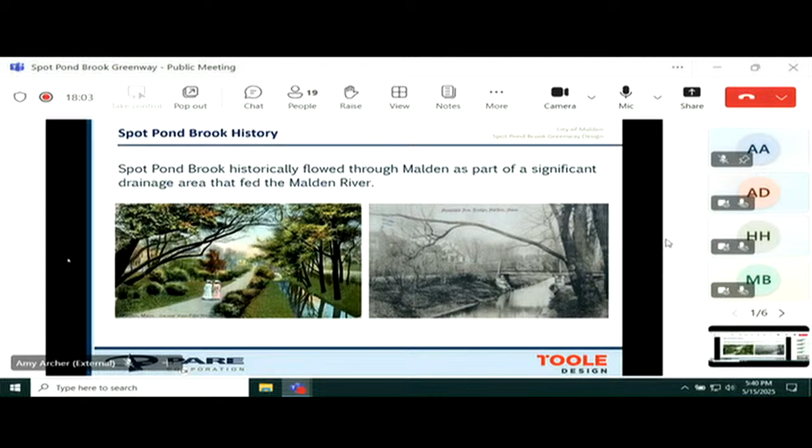Because of flooding, though, and an expanding city, it was culverted to prevent flooding and to allow more development in our community. So one of the benefits is you don't have as much flooding. One of the negative sides of that is you don't have as much of the open space or the nice walking trails that you might have had that naturally would have occurred along a brook.

So here you see in 1897 some rather large drainage pipes being installed. In the distance you can see, I think, the Center Methodist Church, where we would be approximately in the location of this building here.

On the right, you can see the culvert, I believe at Clinton Street in the lower right, and then in the middle, that is actually Oak Grove train station. And you can see really in the distance a smokestack. That is the second Converse factory, which is still on Washington Street in Melrose. I think it might actually have a different name in Melrose, but it's pretty much Washington Street.

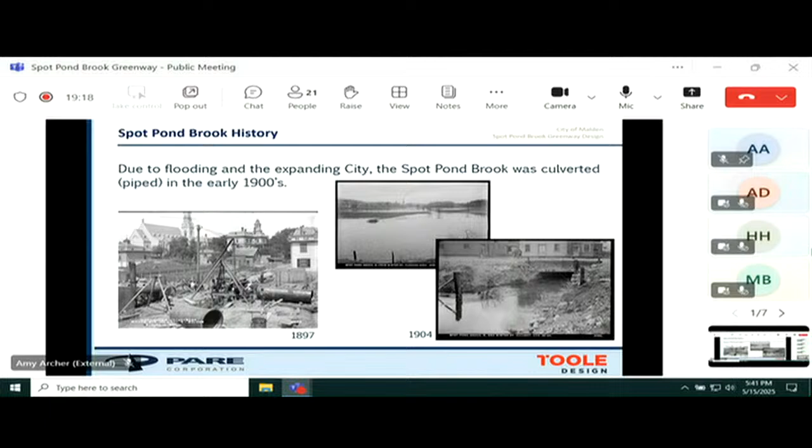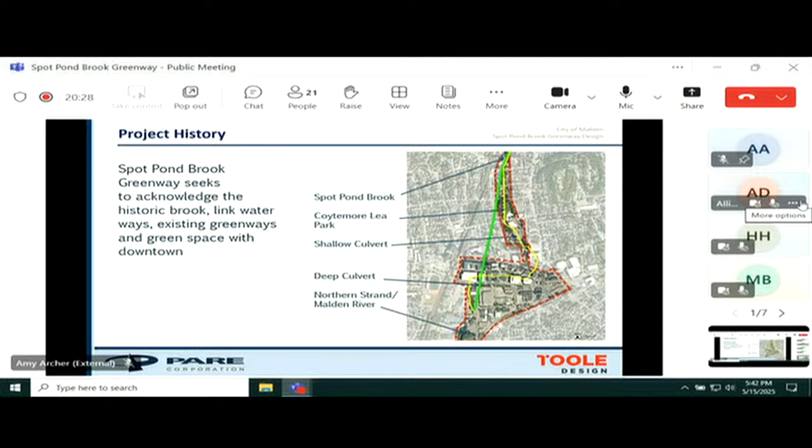So we started this project way back in 2020 with a feasibility study. That feasibility study was funded through local grants through our CPC, and it was co-sponsored with Bike to the Sea and this DCR grant and myself. The thing we were primarily looking at, from 2020 to 2021, was: is it even possible to do this? Is there a way to build this? We were primarily looking at what alignments would be used.

Some of the alignments that we looked at with the help of Pare and some other consultants were Main Street, Washington Street, and then looking at the historic drainage easement along the culvert.

Based on the feedback that we received, I think we had maybe 3 public meetings at that point, and they were very well attended. It was primarily online because it was during COVID. The priority and the public really wanted it to be along the historic route, which is what was selected. One reason being is we didn't want to impact parking and traffic along Main Street and Washington Street. Main Street is a heavy business district. Washington Street can be really narrow in some locations and could eliminate parking. So we chose to go the path of least amount of conflict with those uses.

In 2022, we started doing more conceptual designs with a second Mass Trails grant, and we had more public engagement meetings in the fall of 2022. And then that has kind of brought us to where we are now.

In 2022, we got to 25% design. Just so people understand very briefly, in order to build something like this, when it has to do with engineering, you do a 25% conceptual design that basically is just saying: where is this going to go? What might it roughly look like? What side of the road is it going to be on? Is it going to use existing crosswalks? Are you going to need to add new crosswalks?

Things like that. We got to 25% design in 2022, and that year the City of Malden took that design and were able to get us onto the state's Transportation Improvement Plan. It's called the TIP. The TIP is how you build big infrastructure projects. Probably the most famous example you'll know of now is the Green Line extension into Medford.

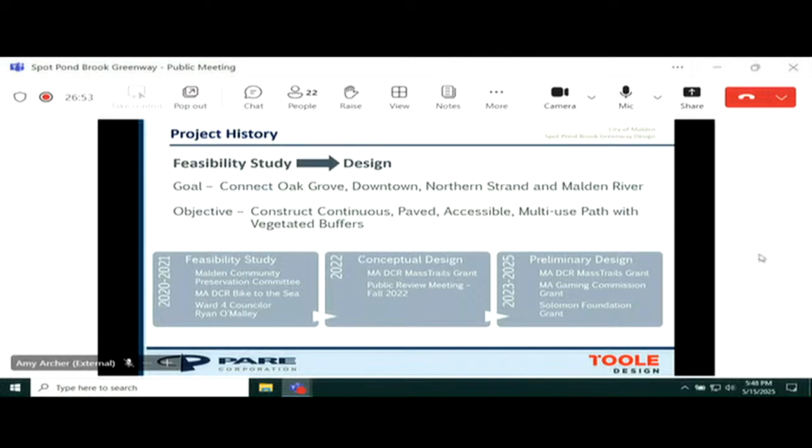It's going to then go west on Charles Street, and then it will take a left going south on Canal and connect through to the path at the approximate location of the bike kitchen. And that's where we'll connect with the Northern Strand Trail.

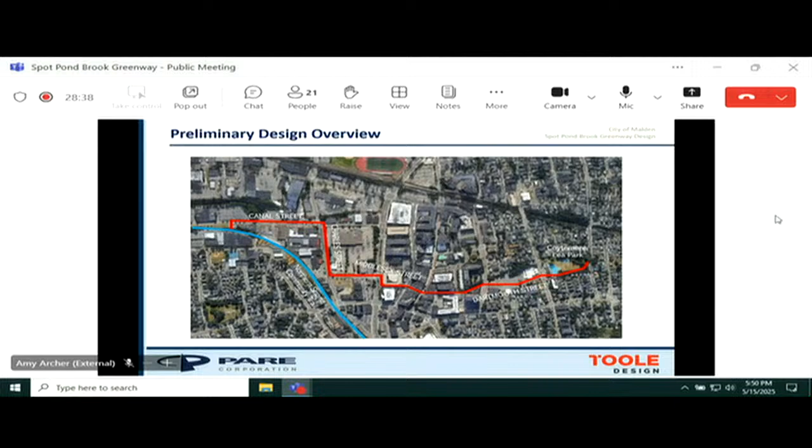As Ryan mentioned, on this screen north is to the right. That will be true for all subsequent plans you see, just to keep everyone oriented so you know what direction you're looking at.

To go over briefly the main objectives as we switched from feasibility to design, one element was to try to keep some of the existing infrastructure. The feasibility study took a look at the width of the right-of-way on each street and considered what may be constructed if we touched both sides of every roadway the path was intended to go down. There is a huge cost differential to that.

Every time we move a curb line, there are a lot of utility impacts between poles, underground elements like sewer and stormwater. So to make sure the project didn't swell to an even larger number than what Ryan had quoted, we worked through with city engineering that it made sense to hold one side of the road, to put the path on one side, work within the existing sidewalk and roadway space, and not touch the other curb line.

So what that typically gave us on most right-of-ways, or what we were attempting to accomplish, was the construction of an 11-foot shared use path that would replace one sidewalk. So the sidewalks today have a sidewalk on both sides. Sidewalk would remain on one side of the road, and the opposite sidewalk would be replaced with the shared use path, widened to 11 feet.

Where additional width was available, we're also putting a landscape buffer between that path and the roadway. We want to make sure that the path users, whether they're pedestrians, cyclists, or both, have some buffer wherever we can fit that in.

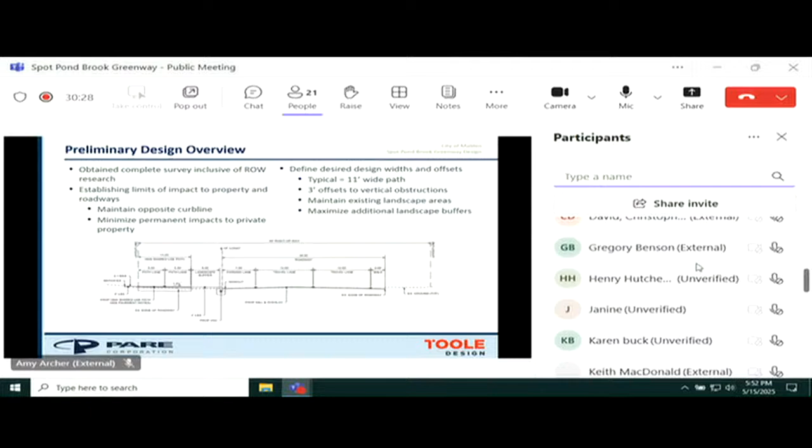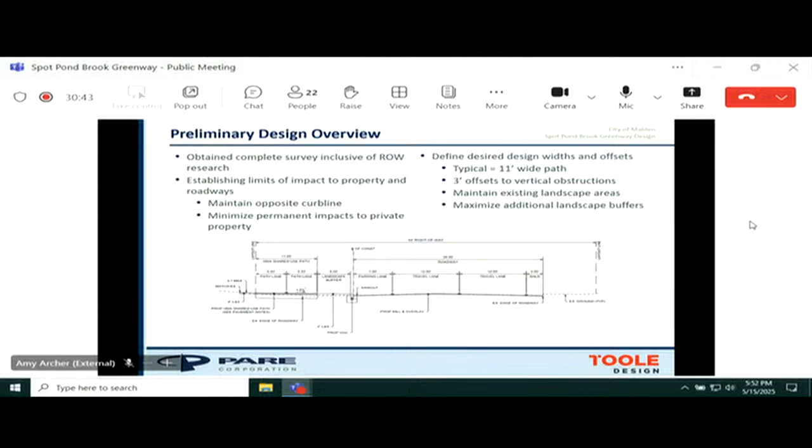Parking lanes typically are going to be shown at 7 feet. You'll see that throughout the plan as I advance along the different roadways. Travel lanes vary — we kept to what most of the roads are today, or coordinated with the city and the DOT based on the type of road, whether it's a collector or an arterial. Different widths are recommended for the lanes based on the type and general volume of vehicle traffic they carry. So that's kind of an overview of what we were looking to implement.

We then took a separate look at each intersection. Tonight's presentation doesn't go into too much detail about individual intersections, but we are working with the city to make sure crossings are safe, whether at a mid-block or at an intersection. We're trying to limit the number of legs of vehicular traffic that pedestrians and cyclists need to cross, and we're putting in additional features if they make sense. So we did consider raised crosswalks, raised intersections, to the extent that they are warranted.

What's on the screen now is an FHWA, Federal Highway Administration, assessment that evaluates the volume on each road, the speed of vehicles on each road, and the lane configuration to determine the best crossing treatment. As we continue the design and advance our coordination and review with the DOT, these elements will get incorporated at those crossings to make sure each one has the safest movement and the least conflict.

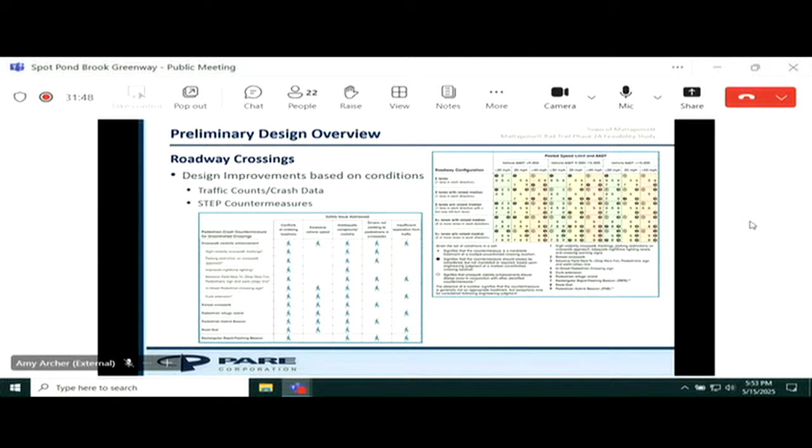All right, so to walk through this now piece by piece, we're going to start on Canal Street. I think Ryan described this in the opposite order, but I tend to start at the south and head north. So we're going to start on Canal, and work our way up from the northern Strand.

At prior meetings, if anyone was able to come out and join us last summer, we had a few different meetings and a lot of feedback. The path was originally shown on the west side. There was a lot of opposition to that, and a desire to have it on the east side.

There was also a necessity to make sure that the properties along that east side have proper vehicle access. So we did turning movements to make sure that different size vehicles, and we reached out to some of those commercial properties to determine the size of the vehicles that need access in and out, including the alley that goes behind and over to New England Coffee.

They have some of the largest vehicles coming down this road. Just to clarify, the two images on the left are showing the view looking north. Anthony's is on the left, the west side, and New England Coffee and the other adjacent businesses are on the right, the east side.

So once we assessed the need, there was also a desire to keep parking on both sides of this road. We had done some parking review and didn't see heavy use, but we were informed that there are uses during different times of the year where there can be parking on both sides of the road, and there was an intent that the city may want to keep that.

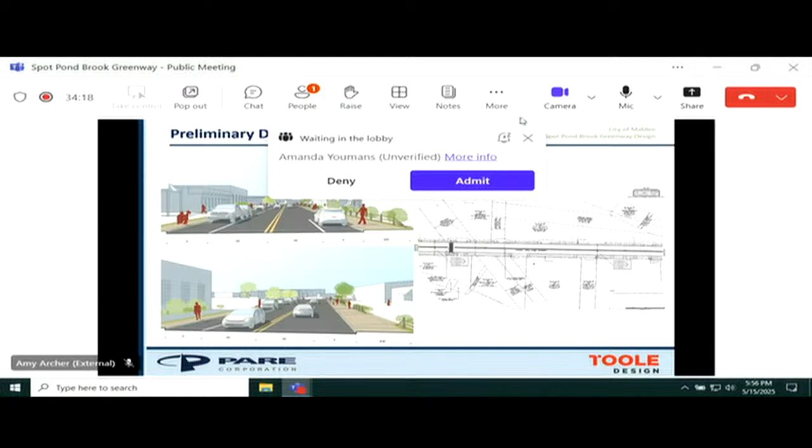That left an 8-foot path, which is a little narrower than what we're striving for the project as a whole, but it's a vast improvement over what's there. The existing sidewalk in many areas is only 4 to 4.5 feet, and there are utility poles and light poles within that hinder the ability, particularly for handicapped people, to get around those obstacles. This was a compromise of the space allocated within this roadway to fit the path.

8-foot minimum is commonly acceptable to DOT in areas where we have constraints. Ideally, they would like at least 10 to even 11 foot as the standard, but we'll justify the constraints that we have here with the different movements and vehicle uses.

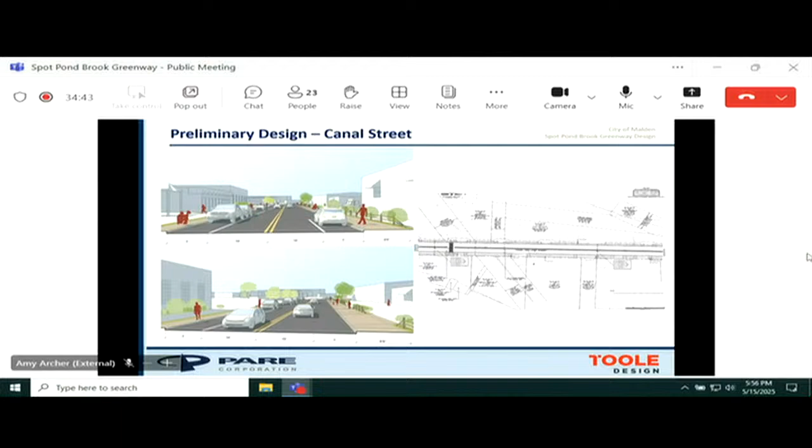With this being on the east side of Canal, we only have to make one crossing at the intersection to get over to Charles Street. So we would just cross within the existing crosswalk at the intersection of Canal and Charles within a protected cycle movement. So, advancing along Charles Street.

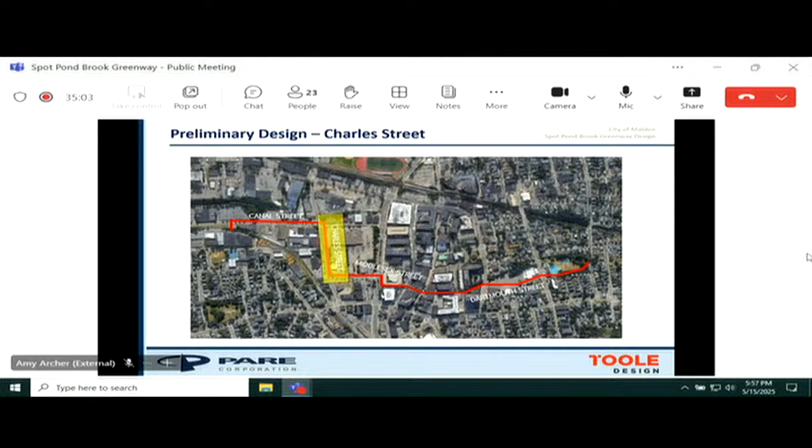For anyone that was at the prior meetings, nothing has changed on Charles Street. This is still what we had presented. As the figure in the upper right calls out, the top image is looking west. The Stop and Shop is on your right, New England Coffee would be to your left, so the left is the south side of the road. This is an area where there was enough room that we are able to put in the ideal recommended path.

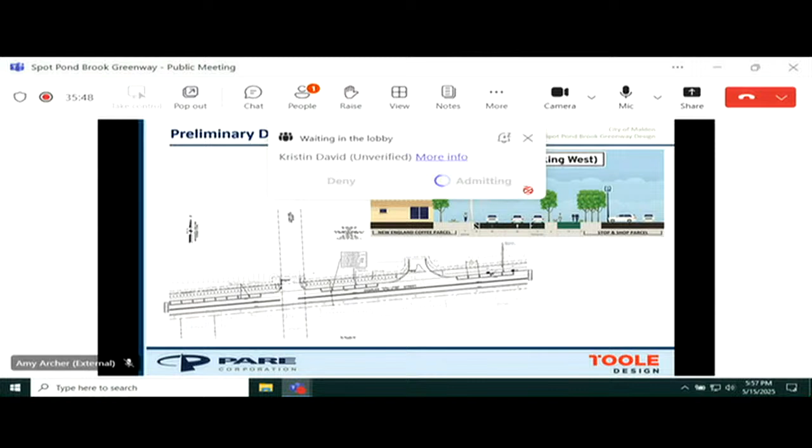We have an existing vegetated buffer along the Stop and Shop parcel, along the entirety of the north side of Charles Street, even beyond that parcel. We are able to fit our 11-foot path and then put an additional 6-foot vegetated buffer between our path and the roadway. So this is, if you will, the true greenway, where you're coming down the path with vegetation on both sides of you.

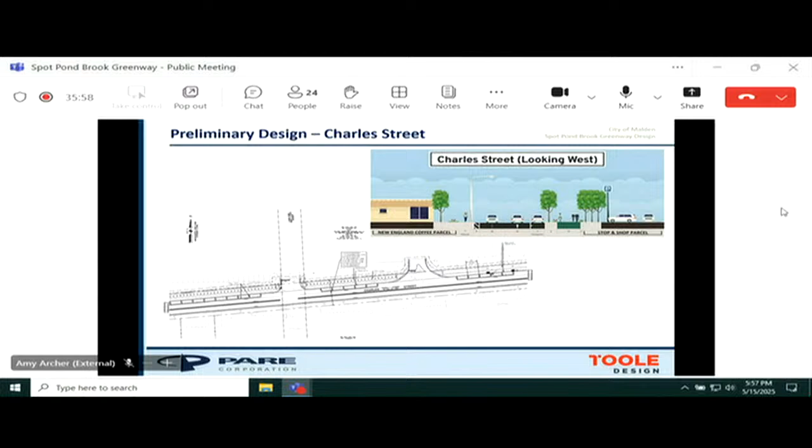When we get to the intersection of Charles and Middlesex, we may have an opportunity to connect again to the northern strand. That's continuing to be worked out with the property owner on the south side of Charles there. But the primary path would continue north and move up Middlesex Street.

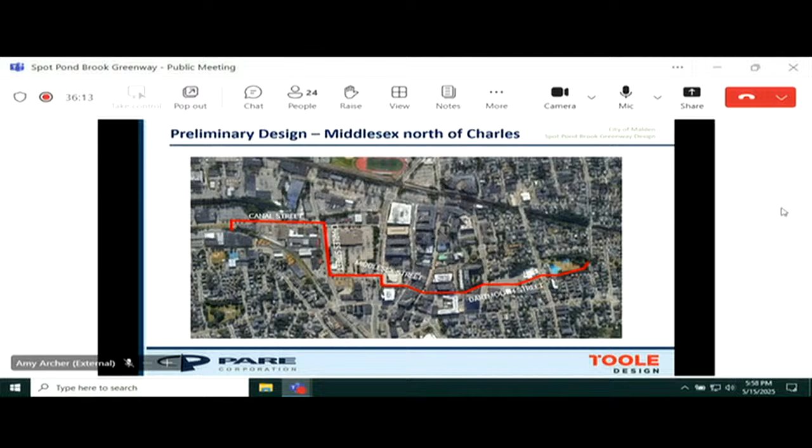So on the lower level of Middlesex Street, we were previously showing this on the west side. There was also an intent to switch it to the east side of the road based on the development happening over there. What's shown here is looking north. We are holding 10-foot lanes for each of the travel lanes, and we are keeping a full lane of parking on the east side of the road, which is what's permitted along Charles, parking along one side.

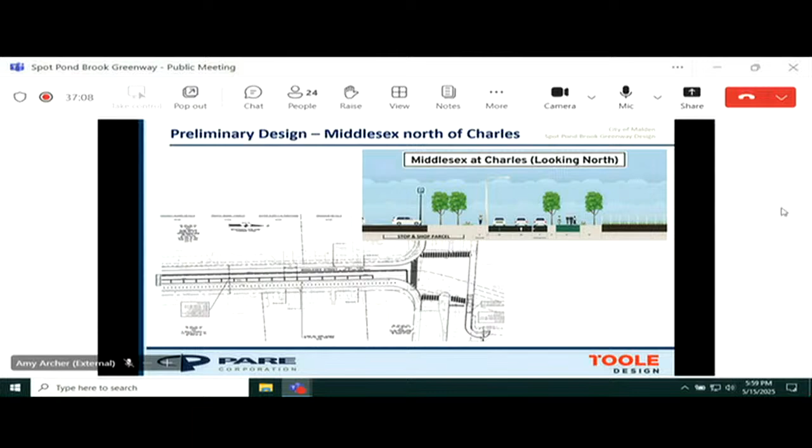The buffer here between the roadway and the path is a little narrower, but this allows us to utilize and maintain existing offsets to utilities and trees that exist along this corridor. So we're maintaining some of the great trees that are there, and we'll have less impact to the utilities than if we had put in a 6-foot buffer. We're still getting that vegetation on each side of the greenway with less impact to other utilities and existing features.

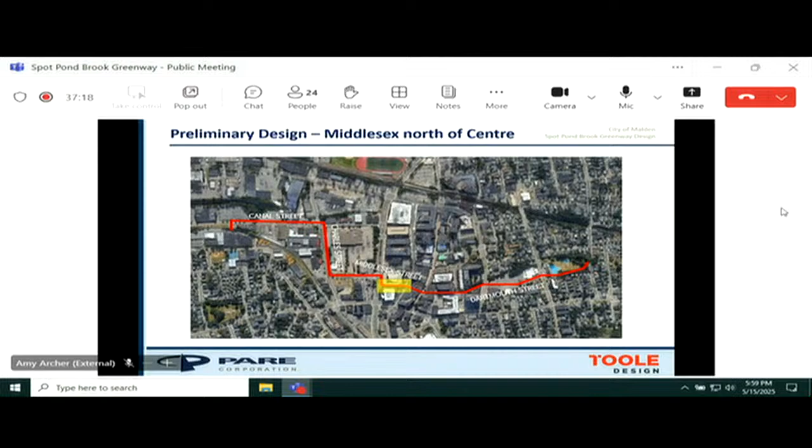As we continue north, we're going to cross Centre. There's a little bit of a skew as we come through Centre near the garage there, and then we continue up Middlesex, so you're still looking north.

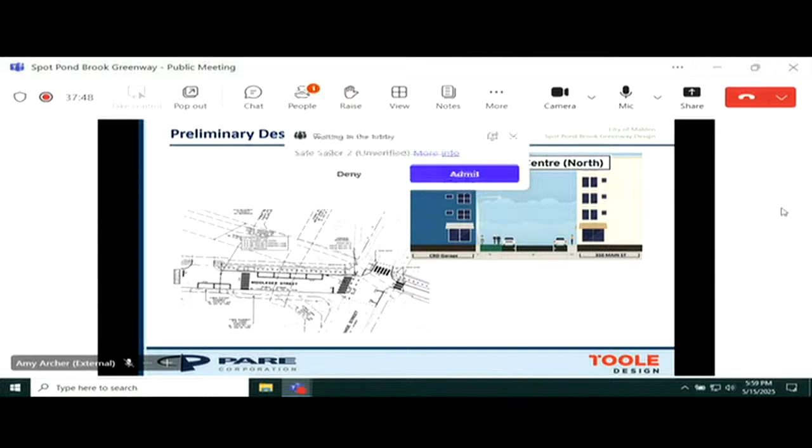In this block, we are maintaining everything that's within the roadway. We had heard at the last meeting that any loss of parking, particularly in this block near the garage, would be a pretty critical impact to some of the different uses. I think there's at least one, possibly two handicap spaces in this area as well that we didn't want to impact. So we've narrowed the area that we're utilizing for the path, and we're maintaining all of those functions of the roadway as it is today, so the businesses and the folks that go to those different uses are not affected.

And just to comment on that, that portion of Middlesex is adjacent to 350 Main Street, which has a rehabilitation facility in there, which is one of the reasons why we wanted to maintain the ADA accessible parking within the shortest distance from that building.

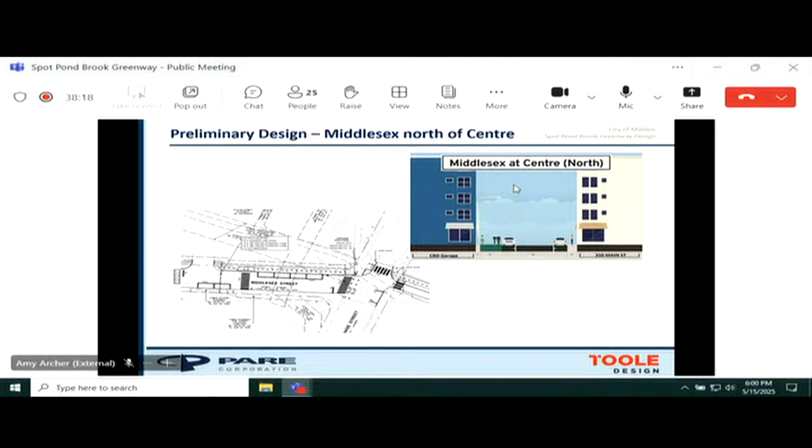So continuing north into the next area of Middlesex, at prior meetings we had put together multiple options for this area, and we heard a lot of feedback. There was concern about mixing pedestrian space, bicyclist space, and vehicle space. There was a lot of intent to keep vehicles separated from the rest of the users, so that's what we're moving forward with. We're advancing the design that puts the path on the west side of the road.

Again, this particular area of Middlesex is not being closed. We're going to maintain the ability - one of the things good to highlight at this point is we are utilizing all existing crosswalks. We're not going to be changing any other crosswalks. We're not removing any travel lanes. You'll be allowed to continue to move through here and circulate through the downtown.

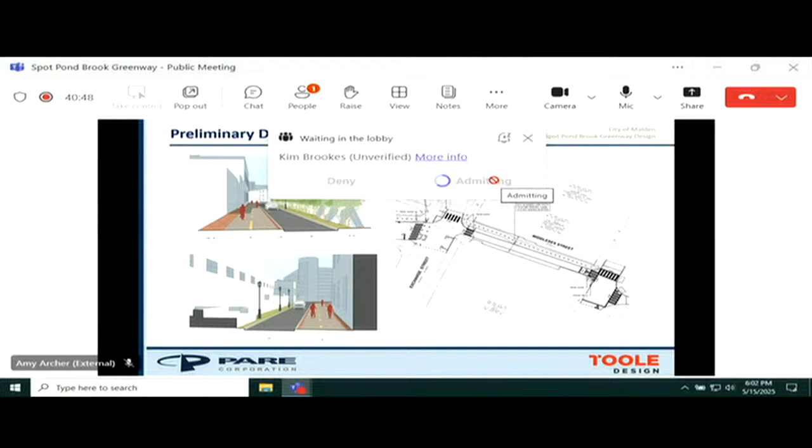The other reason is we did look at potentially removing the ramp, but at this point it's not feasible for us to remove it, though potentially in the future we could, depending on redevelopment. But the other dynamic is that there is an overpass on Exchange Street, which can sometimes actually prevent trucks from exiting that direction, depending on how tall they are. So this section of road is necessary for trucks to egress from points on Exchange Street.

The mountable curb came into play for two reasons. Primarily, it's for emergency vehicles with just a 10-foot wide lane and no other lane adjacent to it since it's a one-way road. Fire and safety said they would prefer a 17-foot area in case they need to go around someone, if somebody stalls out right in that area. We also heard that this is a common route for a lot of the service vehicles that make deliveries to the different businesses along here, so we're trying to make sure they're still all accommodated in the manner that they are today.

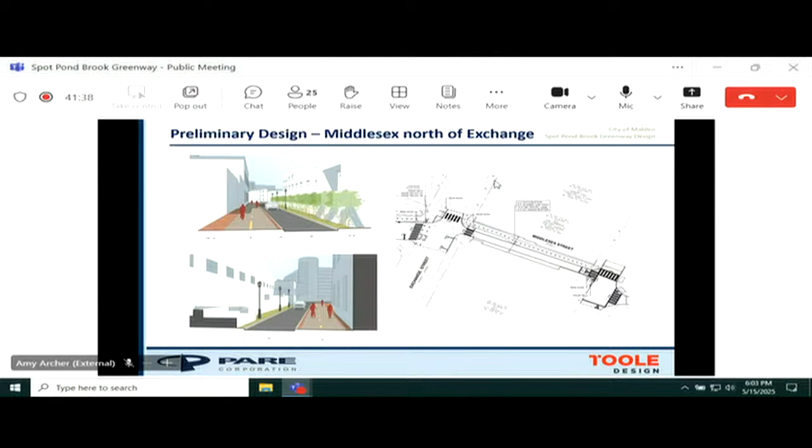As we continue north and get into the lower section of Dartmouth, this is another element where we had a couple options in previous meetings. Some of those were mixing uses between vehicles and cyclists, and we're moving forward with the option that keeps those uses separate. So this would have that mountable curb.

The image is looking north. We're keeping the sidewalk that exists on the east side of the road. We're able to fit an 11-foot lane on this one and still have enough room for our typical 11-foot path, which gives us a buffer to the building. We know a couple of those buildings have doors that exit onto the sidewalk, so we want to give some shy distance so people opening the door and walking out have clear space. They can look left and right, make sure bicyclists aren't coming before they move along the pathway.

And if I could just describe that image. Yeah, sure. That's the image on the left, looking north on Middlesex. On the left is Hugh O'Neill's, or ABCD. On the right is, it's like a professional building. I think it used to be the 99, for those that remember. And 480 Main Street, and the parking lot would continue up on the right.

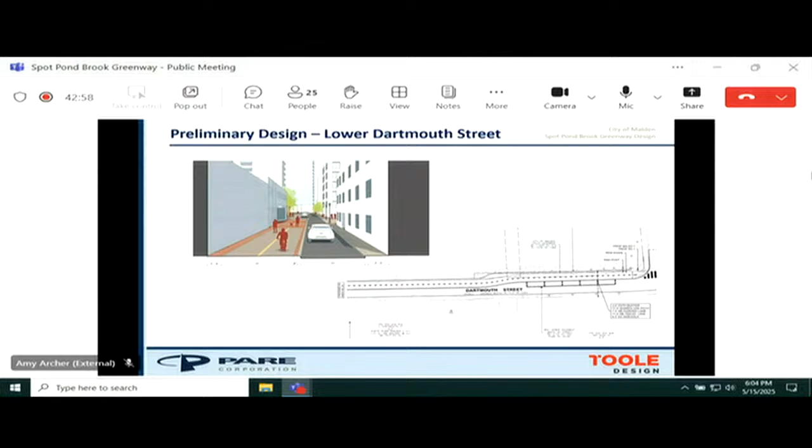As we continue further north on Dartmouth, we hit a short stretch coming near and under Florence where we are able to put in that typical ideal greenway with vegetation on both sides. As we start to approach the Y, we have to narrow out the vegetation between the road and the path, partially for visibility of users and the extent of people expected to be crossing here as well.

So we are proposing, it may be a little small in the plan view, but we're proposing to eliminate parking just adjacent to the crosswalk and apply a bump out so that pedestrians currently using that crosswalk will have a shorter crosswalk and be more visible to cars approaching. The path will replace the sidewalk and the bike lane that currently goes southbound along Dartmouth in this area, so the path is utilizing space already allocated to sidewalk and bike lane.

Again, that crosswalk will be narrowed, and we were able to shift parking just a little bit before we transitioned the lane back at Mountain Ave, so there was no loss in the total number of parking spaces striped on Dartmouth in this area.

So this image is looking north. The parking lot for the post office is on the left. The Y is that larger building shown on your right.

Yeah, and that's actually a good point. So there's no loss of parking in any segment. And actually, there is addition of parking based on the re-engineering we've been able to do in some locations by making it more efficient. So we've lost no parking based on the feedback we received from the businesses and the councilors. So it's an example of the tough feedback having an effect in making it a better project for everyone and all users.

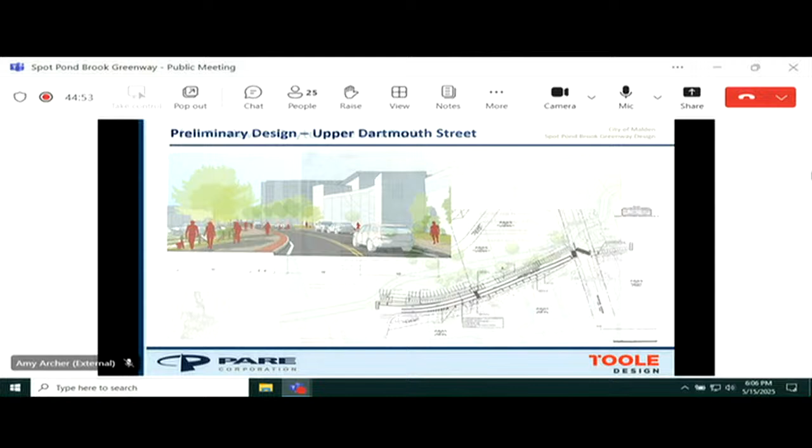So the final stretch, as we cross Mountain Ave, we enter Coytmore Park. We're putting the path on the east side, coming around the east side of the pool property, continuing north along the field.

One of the things we did in this area was try to look at retaining all the components of the monument at the southern end of the park adjacent to the pool, and then maintaining key trees. So we went through and redid the alignment to make sure we were to the east of the monument, and then worked with the landscape architects at Toole Design to identify the species of the trees within the park and make sure we weren't impacting any, particularly the large one. It's on the bottom right of this image, actually one of the northernmost ones in the park.

And just as full disclosure, I really worked them hard when it came to protecting the trees. I and some of the people in this room helped plant some of these trees, so I was making sure that if it was a tree or the path, it's going to be the path that has to move, and we're going to save the tree. So we have a little bit of a meander here, specifically to avoid the shade trees.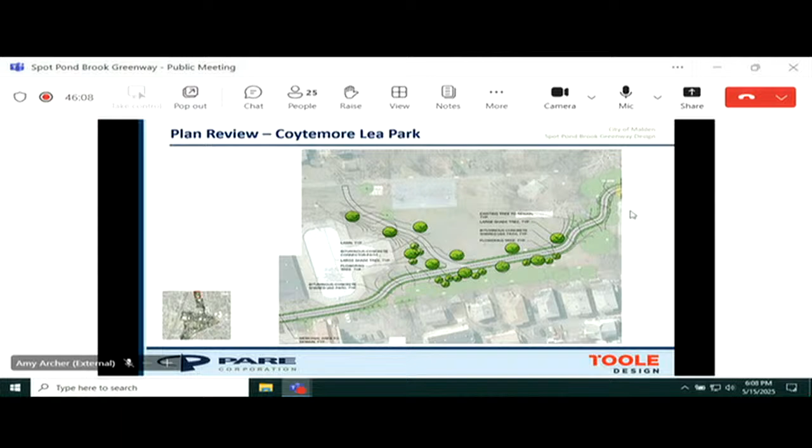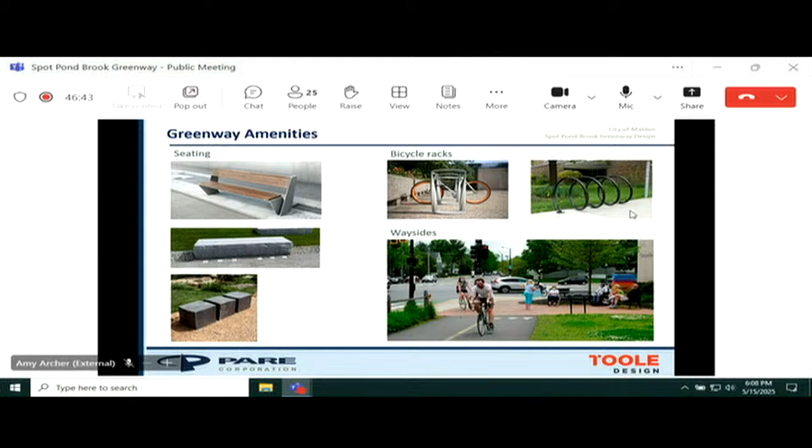So that being the last section, we're just highlighting a couple of the amenities we could implement along the path in some of those buffer spaces or pocket spaces between the proposed path and some of the uses. A couple different seating options, more standard ones, more natural ones. We have different bike rack options. Wayside is kind of like a small parklet that exists at a trail entrance, if we can implement those at some of the intersections. Pleasant is one of the main areas that has available space where we can utilize that.

And then plantings and stormwater management. So those buffers that separate users along the path from the roadway also give us opportunities to collect and treat some of the drainage from the road. It helps with the vegetation, allowing us to make the area a little greener while still treating the elements coming off the roadway and the path itself. Generally, the project doesn't have any increase in impervious surface since we're taking either existing sidewalk or existing roadway pavement and turning it into the path. So it's kind of a wash on what's there, but this will help increase the elements of the greenway.

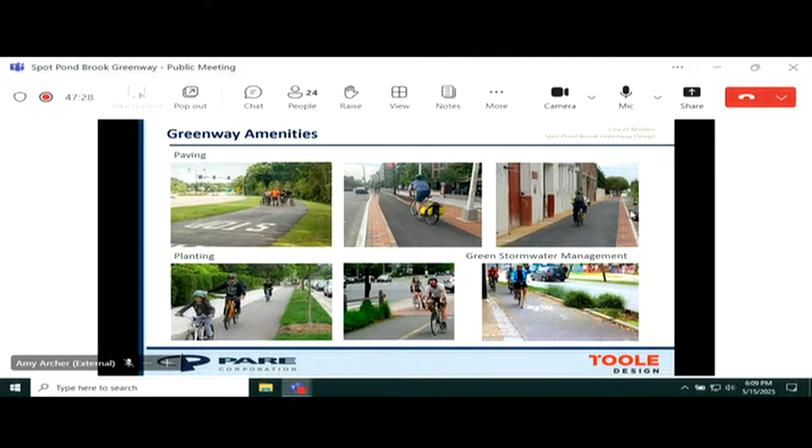Ryan interjected a few of these points, but we wanted to highlight as a whole some of the key things we heard at the public meetings last summer that we wanted to make sure were taken into account with the design as we advance it, revise the 25% design, and get it back to the DOT for review. There's no loss of parking along the length of the roadways within the project limits. There's no loss of travel lanes or vehicular movements compared to what exists today. We are implementing greenway space wherever we can to separate users from vehicular traffic. Even where we can't fit a wide enough space for vegetation, we're putting in small, either stamped concrete or brick areas for some separation between the two. And then park amenities are preserved at Coytemore Lea.

So at that point, we'd like to open it up.

Yeah, one more thing about scheduling, and I just want to clarify this. Because of the hard work of OSPCD, as I mentioned earlier, we're on the TIP, the Transportation Improvement Plan. We are slated at this point for federal fiscal year 2029. The federal fiscal year, like our fiscal year, actually starts in 2028.

Just so people know, we're now looking at a revised 25% design that will eventually, after this community engagement meeting and after we talk to the Traffic Commission on Tuesday, May 20th, and after a couple more meetings—I hear there's going to be one on May 28th—at that point we submit it to MassDOT, our revised 25% design. They take it, do their analysis, which takes up to three months or more, and then it kickstarts a whole other series of public engagement meetings. The goal of those meetings is to get us to 75% design and then 100% design.

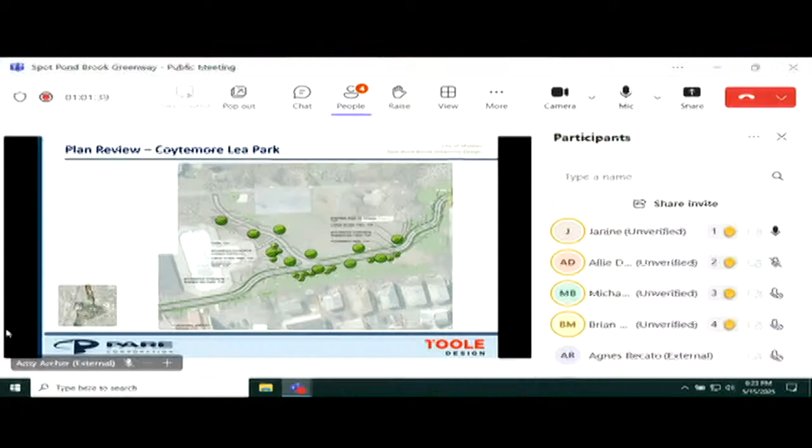Yeah, so it's probably a little hard to see, but the squiggly lines near the northern part in particular, those are grades. So we are making sure it's still ADA compliant. We are right near that 5% max that we're trying to maintain. So the northern part is a little bit steeper, and that's why it's partially meandering to go around the trees, but also partially to make up that grade differential and not exceed the ADA compliant grade.

And I have one last question, probably best for Ryan, and I think you kind of answered it, but I just want to ask a little more. Is there any idea - I know that you ran into some problems with abutters for going to Oak Grove - will there ever be a phase 2, potentially, to get to Oak Grove?

So the decision by the city has been to focus south of Clifton Street and to explore some more on-street connections with other advocates, with signage. We're looking at the option of potentially Washington Street. The private property impacts at this point make it not viable north of Clifton. But if those private property impacts change, then it could also change, but we're focusing south where there's not the private property impacts. Oh, I thought there was a utility right-of-way through there. Okay.

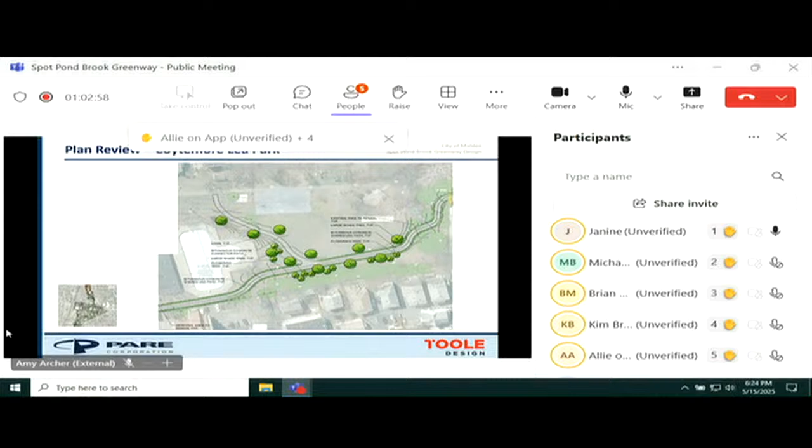There are utility rights of way. I've learned a lot about easements and overburdening of easements, so I can't answer that question.

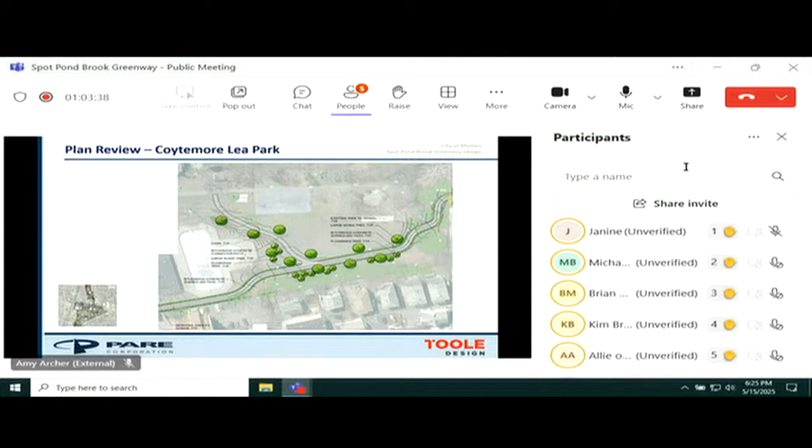Hi everybody, I'm Susanna Cortez, and I have a question about this picture. Are you moving the World War II monument like on the original plan? No, we never were going to move it. It was said at the last meeting that it was going to be moved a few feet over, but just to clarify, the monument was never going to be moved. There's a small wall next to the monument that was going to potentially be moved, but we're not moving that anymore. We've been able to move the path.

I have a couple of questions, the first from my colleague Mr. Barry. He wanted to know who's responsible to maintain the sidewalks should these extended sidewalks go in. Right now businesses are responsible to plow or shovel them. What happens when they're even wider? That's a great point. The northern strand is maintained by the city of Malden, and the plan would be for the city to put this on the same list. We have a small bobcat that clears the bike path in the winter, and it would be part of that route. So businesses would not be responsible to cover that area if there's an extended sidewalk in front of it? For the portions that are part of this, yes, absolutely.

There's a number of people who want to give feedback on this who were not able to join tonight. Who do they send it to? We're going to have another meeting on Tuesday, May 20th at 5 PM before the Traffic Commission, giving the same presentation again. We're not asking for any votes of the Traffic Commission, we just want to have as many meetings as possible. If you have questions, you can send them to me, Councilor Crowe, or Councilor Spatafora, who has also been very involved. We're the three internal stakeholders as the ward councilors, and he's at large. It's mostly feedback, because it's difficult for people who are working to get here at 5:30, and the next one's at 5, and I think there's another one at 10 a.m. So if people would like to offer feedback, they should email you, and CC Peg and Councilor Spatafora.

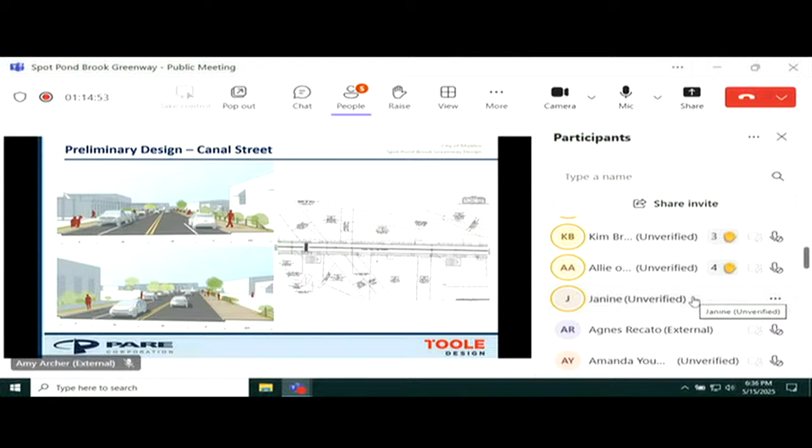Do you have any specific data on the crashes? I don't have it at hand today. Some of the main areas we looked at for crash data was at the intersections. We're trying to make sure that in areas where people are crossing vehicular ways, they're either at a signalized intersection with a protected movement, or we're enhancing a crossing to make sure they have safe and visible movements. I don't have that data on hand at the moment.

But on a related topic, which I think also helps address some of the comments that have been made, we have some diagrams of the turning radiuses on Canal Street, so we're going to bring those up, since that relates naturally to the conflicts just mentioned as well as the prior speaker's comments.

We made sure the openings were sufficient for the clearances. We are not allowing parking on the corner on each side, so the parking is set back, giving more visibility for vehicles approaching from each direction and for path users. But the path on this roadway is essentially going to be a wider sidewalk - an 8-foot sidewalk. There are several sidewalks throughout the city that are at least that wide.

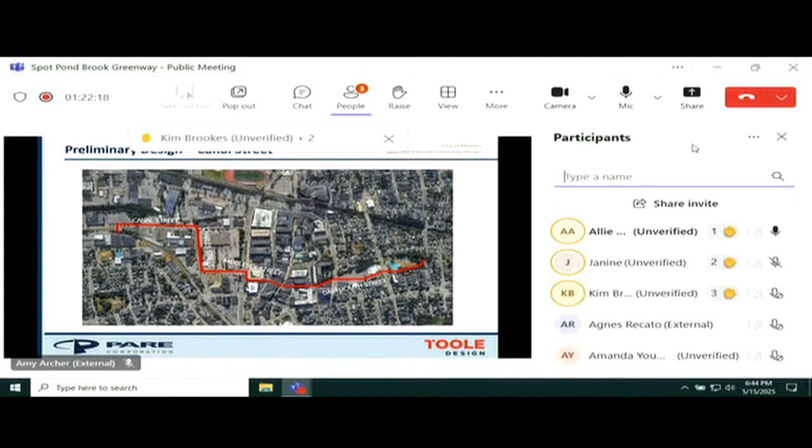So I just want to make that point. Thank you. Thank you, Councilor Winslow. Allie, if you want to try to unmute yourself. Does it work now? It is. Welcome. Okay, thanks. Yeah, I had it on the browser, and the browser wouldn't unmute, and I also couldn't see anything. But now I'm on the app on my phone. But anyways, I am Allie Durack from Ward 5.

So I went around speaking. I really like this project, and I look forward to it being followed through. I went around and spoke to some businesses to see how they felt about it, because I understand there's a lot of concern about Malden businesses. Sometimes I feel like it's more than the residences, but I can see the conflict. There's a lot of weight on the businesses, and speaking with the owners, I've noticed some of them are a little shy about approaching the city on the topic because it's such a heated conversation.

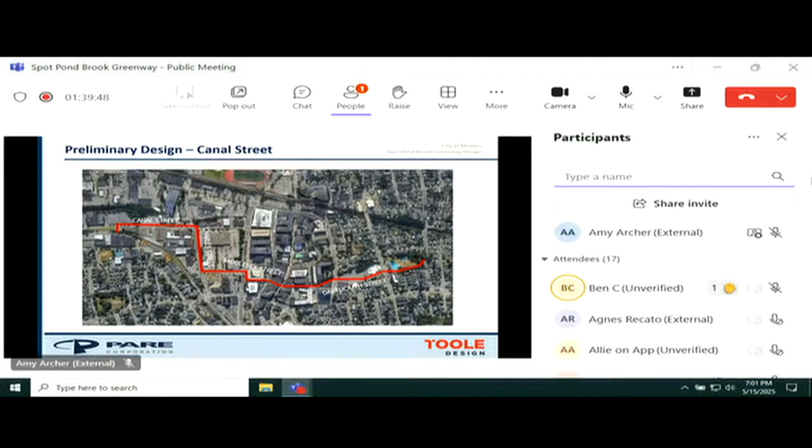Hello, my name is Gwen Loftman, Ward 4. I don't own a bike or a car, I'm a pedestrian, and I'm really excited to see the path continue along Canal Street and provide a much more pleasant way to get to Stop and Shop. I feel like my quality of life decreases significantly the closer I get to Route 60 right now. So just having a nicer way to get to Super 88 on Commercial Street and to Stop and Shop is something I really appreciate.